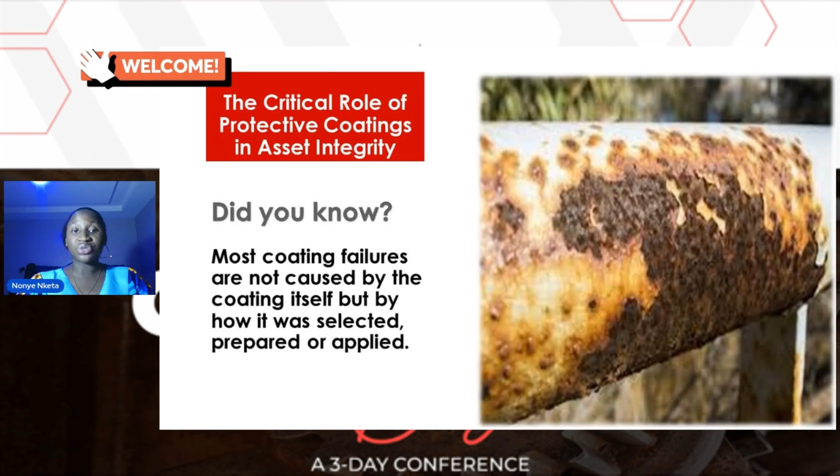Did you know that most coating failures are not caused by the coating itself, but by how it was selected, prepared, or applied? That is one fact I want to establish: a coating failure does not necessarily mean the coating is bad or improperly manufactured, but it is a decision from what we do—how we select the product, how we prepare the substrate, and how the product is applied. Protective coatings are engineered systems, not just paints.

I've had a lot of arguments about what is paint, what is coating, and the differences between them. Paint is paint. In fact, even professionals in the industry still hear a lot of people talk this way when it comes to asset integrity.

You know very well that it is not just paint, it is protective coatings, because we are trying to mitigate corrosion. We're trying to protect our substrates from corroding and deterioration that can come from the corrosive environment. Protective coatings are an engineered system, not just surface finishes, meaning there are a lot of intentional efforts put into formulations to ensure the product meets requirements of the substrate and the environment it performs in. They act as the primary barrier between assets and the corrosive environment.

When we talk about protecting our systems and assets in different facilities, what we are trying to do is prevent or protect that substrate, that asset, from reacting with the environment that will cause it to degrade. One of the common ways to actually protect this substrate is by the use of protective coatings. They act as this primary barrier between the assets and the environment they are placed in, and the condition at which they are working.

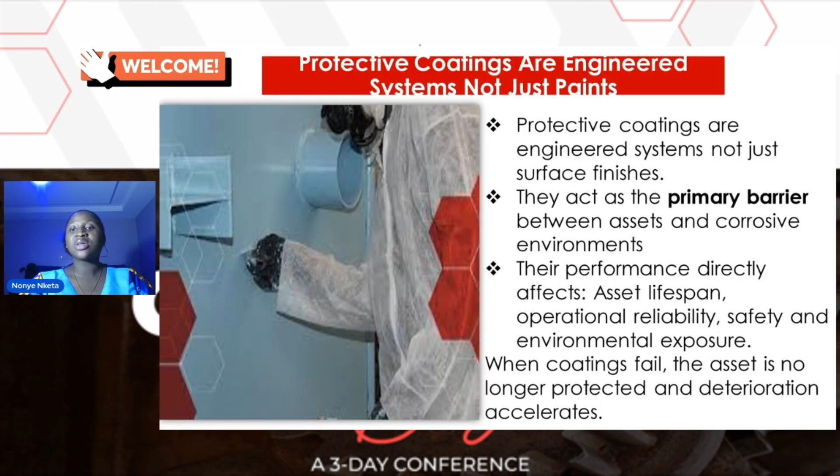Their performance directly affects asset lifespan, operational reliability, safety, and environmental exposure. So when coatings fail, the asset is no longer protected and deterioration accelerates. This is one of the reasons why we really want to protect what we value, where our money is coming from. Always keep in mind that the moment you compromise on the coatings protecting an asset, you're already trading with destruction—trading with loss, safety issues, and all the problems that come with degrading assets.

So coating selection—this is where it starts going wrong. I've heard a lot of people say, please just give me... In fact, I've noticed that in this part of the world, we are very careful with costs. We try to manage when it comes to design and material selection, but when it comes to protecting that system, that is when we know we are going above budget. So coating selection is often where most people still get it wrong today, and these are some of the ways.

Coating selected based on cost and not on the conditions of the substrate—this is very common. A lot of people can do everything right, but when it gets to the time for coating the system, that is when they start asking, are there no alternatives? Some will even tell you, let's just coat it so it looks neat for the GM or the asset owner to know that we are working. Some will even tell you intentionally, if we coat it in a way that it will last or stand the test of time, we won't get jobs.

So the cheaper the product, the more the opportunity for us to repeat this job. But if we look at it closely, is this really economical? Is it really safe? We do a lot of compromise because we're trying to cut costs. As far as I'm concerned, if we do that we're just being foolish in the real sense, because at the end of the day you spend more than you think you're actually spending.

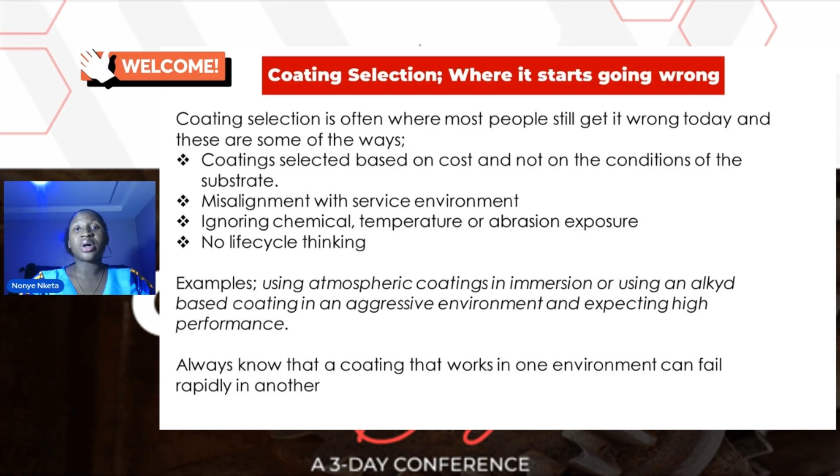So always know that a coating that works in one environment can fail rapidly in another. So it is not just about the coatings, it's not just about what you buy, it is about the decision you have made while trying to coat that system. So let's be more intentional.

Then matching coating resin systems to service conditions. The basis of every coating today is the resin, and the resin actually is the binder. It's what tells us how that coating will perform. That is the major chemistry behind every coating product. For any coating at all, you may want to ask what resin system it is, so that it helps you know how the coating will behave in certain environments.

Like for atmospheric exposure, you want to use an epoxy base, probably as a primer or intermediate coat, and a PU. And why are we using a PU? That's because epoxies are mostly susceptible to chalking. They are not friendly with sun, with UV rays. So if you want your epoxy to perform well in an open space or atmospheric exposure, you need to top coat with a polyurethane-based product. And why does it work? Because it gives corrosion protection plus UV resistance.

Then immersion, like you have a system that is submerged in water. What kind of coating would you use? An epoxy and a glass flake epoxy. The reason is because they have very low permeability and good barrier protection. Then chemical exposure, you want to use Novolac epoxy because of its high chemical resistance.

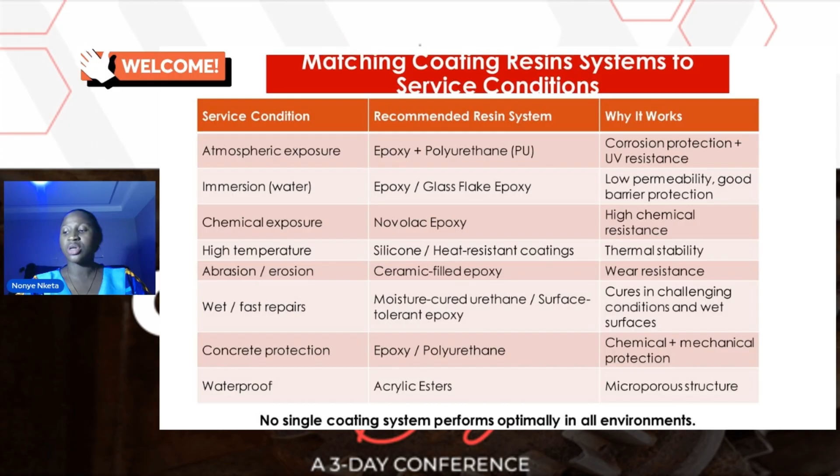So moving on to the next slide, we have surface preparation. This one cannot be overemphasized, and I think that is where the largest failure rates are attributed. Some of the common mistakes here are inadequate blasting. As coating inspectors, if you're on the field, you see a lot of this happening, and sometimes you see contractors giving you one reason or the other why the system cannot be blasted further. Some will even tell you, we did this. In fact, this time around, you see a lot of terms.

You hear a lot of terms, and you'll be wondering, where did this one come from? Like, is this an SSPC standard, or where? What did you develop this standard from? That makes you feel that with this current level of cleanliness that you have on that substrate, it can actually hold the incoming coating and it will stand the test of time. So we need to be very, very careful and be able to stand our ground in certain situations.

Okay, so residual contaminants. This is very common too, part of the cleanliness problem we normally have on substrates. Then incorrect surface profile. Yes, you see a lot of blasting going on. You see a lot of surface preparation. Know that when you don't have the correct surface profile for the system, for the coating that is about to go on top of the system, you're likely not to get the adhesion that is needed for that coating.

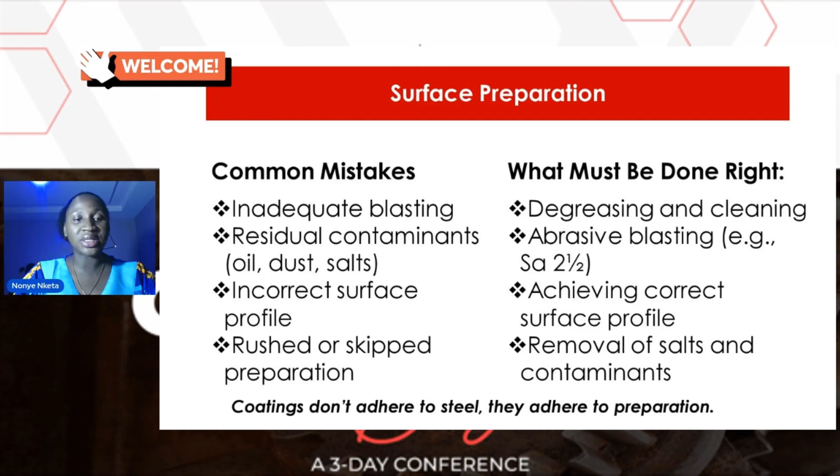But when we want to compromise at the preparation stage, just know that you're also compromising the result of that coating. And like I said in the earlier slides, when your coating fails, you just increase the rate of deterioration of that system. So coatings are there to protect the steel, and they depend on preparation.

Moving next to application. So we've talked about selection, we've talked about surface preparation. Now let's talk about application. The same coating that has gone through proper selection has also gone through good preparation before it is applied on that surface. The next thing is application. Now, I know there are lots of techniques that should be put in place when applying products, and it requires people that are skilled, people that know what is required. So application techniques, setting your spray gun, the pressure and all of that.

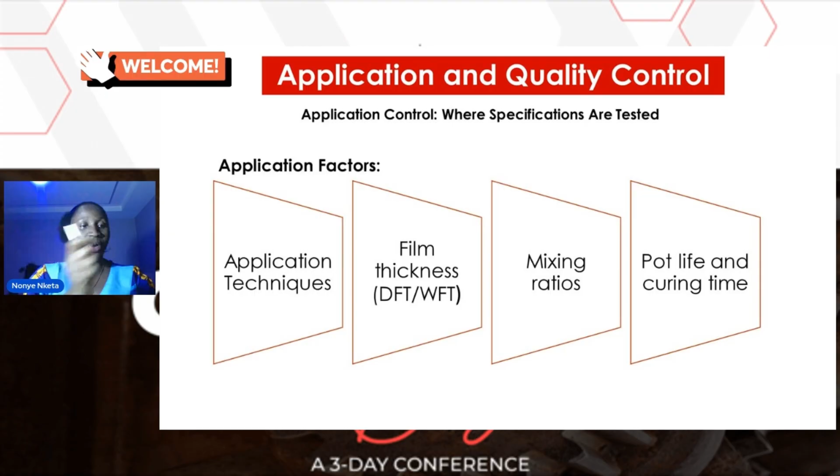Then film thickness, a lot of people don't even care. What they know is do one pass, do two passes. So you need to be sure that you're getting the required wet film thickness that will give you the specified DFT at the end of the day. Then mixing ratio, very, very important. Then pot life and curing time. All of this information is usually given on the specification data sheets or product data sheets or technical data sheets, as the case may be, depending on what the company calls it.

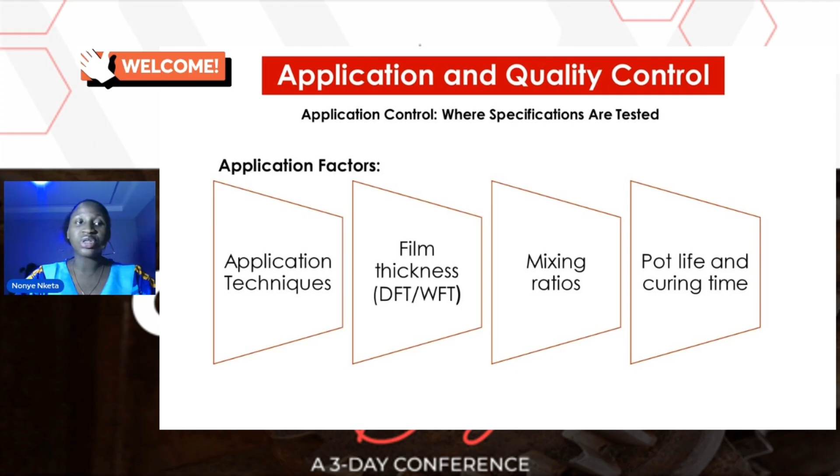So all of these are very important while you're preparing your coatings to actually do well on your substrate, to actually protect your substrate. And as you're doing this, you also need to check for quality and be sure that you are conforming to what is expected.

Then the next slide is environmental conditions. This is the part that most people often overlook. You're just ready to coat, not even wondering if the environmental condition is suitable for the product you want to apply. The temperature: as a rule of thumb, we know that surface temperature must be at least 3 degrees above dew point. 3 degrees above dew point. Do we really check? Sometimes you see some people, they will tell you, okay, we can do this job at midnight before the asset owner comes.

So as much as you want to see your job done fast, as much as you want to meet up to deadlines, please, you have to be very, very careful, because these assets are very critical and important, especially in the oil and gas environment. In fact, every environment actually, because we have steels performing different functions in different industries.

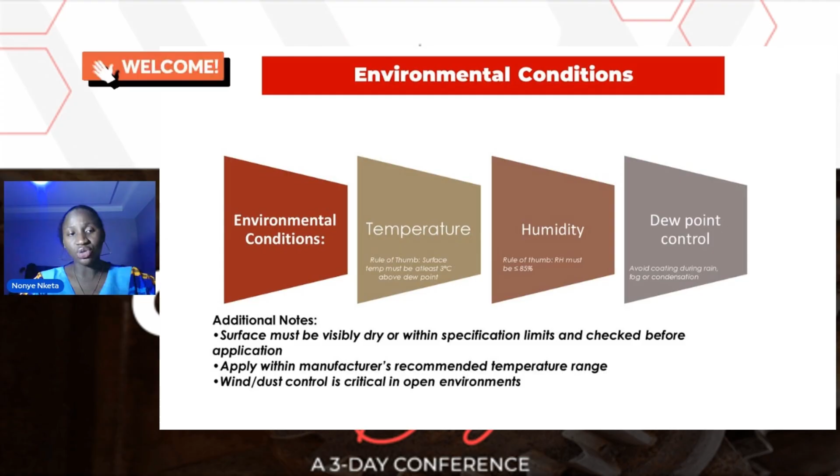Then the humidity: as a rule of thumb, relative humidity must be less than or equal to 85%. Then dew point control too. Avoid coating during rain. So you also have to ensure that you are conversant with your technical data sheet. You need that document. I've seen a lot of people who buy products, and even when you give them the technical data sheet, they don't know what to do with it. And I want to believe that as professionals, that should not be seen within us.

You have to ensure that your technical data sheet is as important as your notepad, as important as your logbook. You understand? So you have to be sure that you're working within specification limits and what the technical data sheet is saying to guide you on how to go about application of this product. Virtually every technical data sheet I've seen gives information about the level of surface cleanliness required. It tells you even the settings of your spray gun. It tells you the kind of environmental condition or temperature at which the coating should be applied.

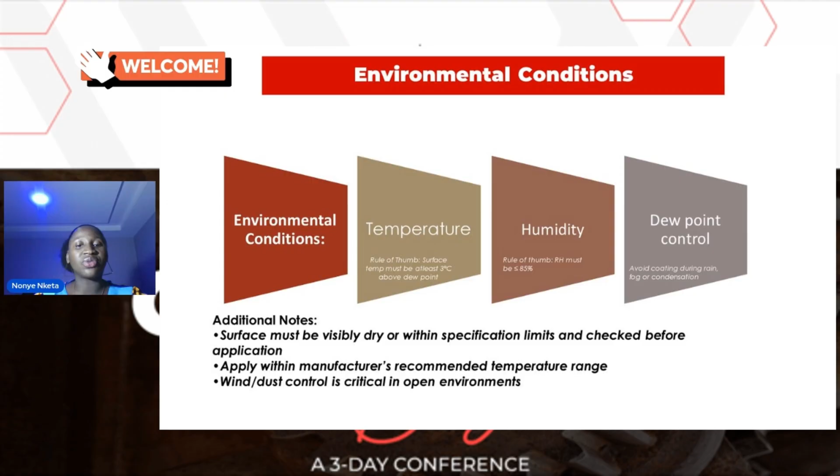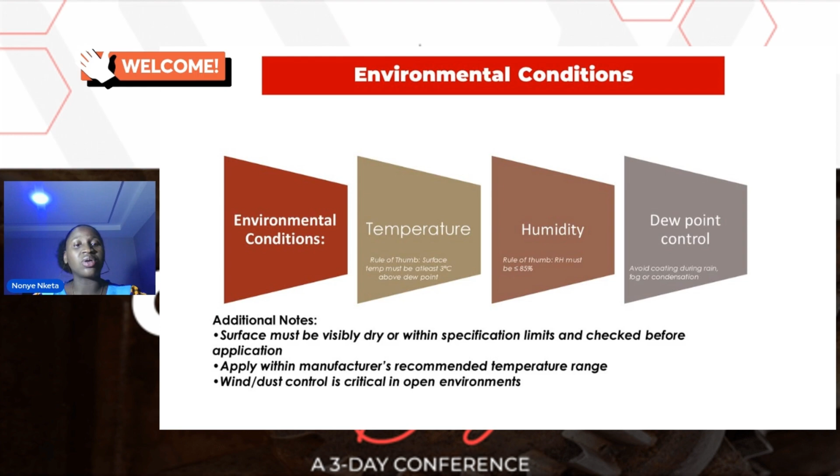So let's always do it. That is one area a lot of us actually miss. If you're not sure how to go about it, consult the manufacturer's data sheet. Apply within the manufacturer's recommended temperature. I already said that. Then wind or dust control is critical in an open environment. I notice a lot of us also ignore this part. So if you are coating in an open space with high wind speed or the likes, you may need to control the environment in such a way that it doesn't give you a bad spray result, or even bring the dirt that you've wiped off back to the surface.

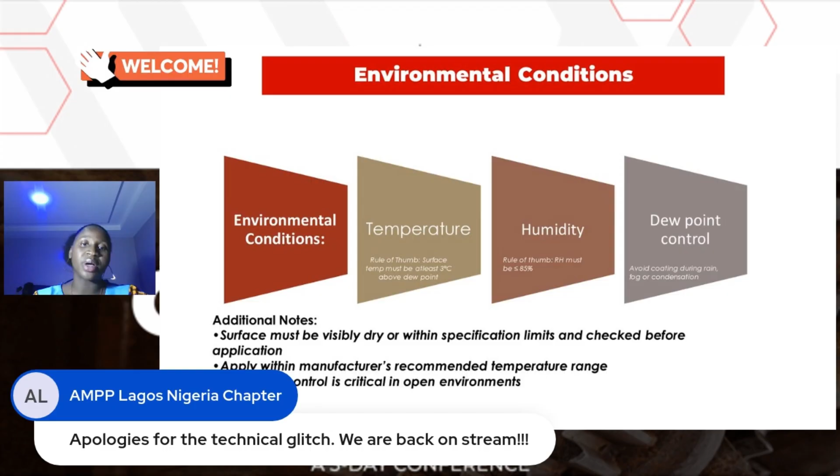So this now takes us to quality checks. These steps are important to confirm all parameters are within specs, align with the coating manufacturer's data sheet, and conform to standards and best practices. It is important to check the following after application. So we've talked about what protective coating is. We talked about selection and how we should be intentional about it. We've talked about surface preparation and the quality checks that should go into our surface preparation, quality assurance. You check anywhere that corrosion could start from. You need to do all of that.

Then adhesion test too. We all know that the adhesion test is actually destructive, and I normally advise you should always have a sample panel to do all of this off field before getting to the field, or before carrying out that same test on the system you have coated, except the asset owners authorize you to do so. You understand? You don't want to destroy a 3,000 cubic meter tank because you want to prove that what you have inspected or coated is right, except the asset owner tells you, okay, go ahead, I want you to carry out the adhesion test on the substrate and let me know. I'll bear the cost of whatever it will take to repair it.

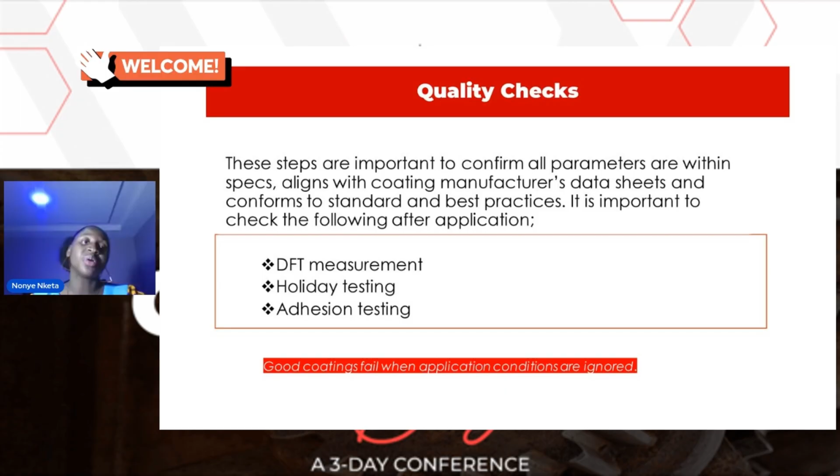So once you've done that, you document rightly, and you're sure that you can report the exact condition of the substrate that has received coating. And apart from documentation, when there's a failure, you know what to reference, and you are able to trace where these failures come from. Good coatings fail when application conditions are ignored. That is just the truth. If you don't do all of these things, no matter how good the coating is, it's likely to perform below expectation. Then failure mechanisms and root cause.

So we see a lot. These are a few of what we see almost every time on the field. So you may have blistering. This is actually very, very common. And what are the causes? Moisture ingress, salt contamination from the system. Then peeling. That one is quite obvious: poor adhesion. And sometimes when you apply a coat without a primer for a product that requires you to prime before you apply it. If you don't prime, you're likely to get peeling.

You're likely to get the paint to peel if you don't get the right surface profile, because surface profile gives you the anchor for this product to adhere upon. So if there is no proper surface preparation, and you don't have the right primer beneath the top coat, it is likely not to stay. It is actually very common.

Then cracking, which comes from excessive thickness. Then rust bleed. In fact, that's actually the result - you see a very beautiful coating that you think is very nice, very clean, smooth and shiny, and you start seeing dots here and there with rust from those portions. That is a result of an area that's been skipped while coating is ongoing. That's a result of all the pinholes.

Then blushing. Amine blush, for epoxy based coatings, comes up mostly when you're coating under moisture or a high humidity environment during drying. So you want to cure a product that is not supposed to cure under moisture, while the relative humidity is high. You definitely get that skin blushing. Those blushing are all those things you see - you start seeing a lot of shades on a surface that has been coated.

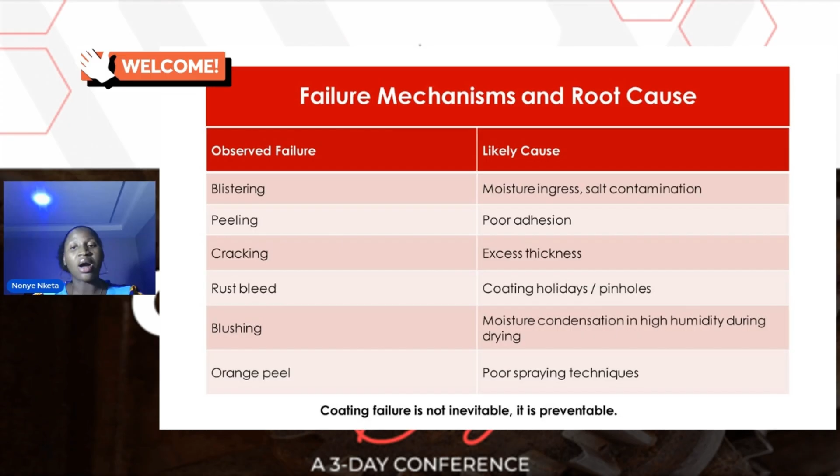So some coating failure examples, these are quite common. I want to believe at least 90% of us on this call would have seen some of these failures or coating defects on the field. So I just picked a few common ones.

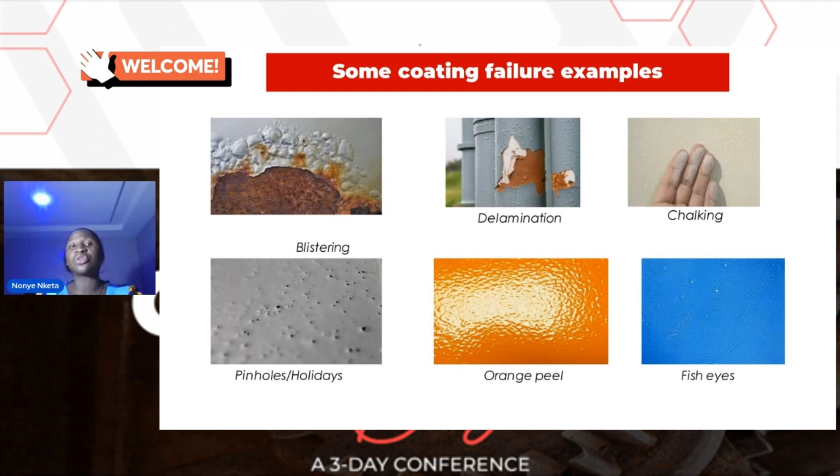These are quite common. It's just for me to let you know that yes, they are common, but that does not mean they should actually be happening. On this kind of day, World Corrosion Awareness Day, it's just for us to reinforce our knowledge and remind ourselves that just because they happen always does not mean it is impossible for them not to happen. It's a conscious effort we all have to put together as professionals in the industry to reduce the rate at which our coatings fail.

Then going to the next slide, breaking the cycle of coating failure. I've talked a lot about why coating fails. Now, how do we actually stop this from happening? Like I said, even though it's not on this slide, it starts from our own individual decision. It starts from our attitude, from how do we really see these coatings. Is this supposed to be just for the sake of working and getting paid, or do we really have to make this protective coating protect what it is supposed to protect?

So it all starts from our decision, from coating selection. It all starts from the conscious effort we put in while trying to ensure that our surfaces are clean. So select based on service condition. Like I said, no two coatings perform the same way everywhere. That a coating works very well on this particular region or surface does not mean or guarantee that it will perform very well in another region. So select based on the service condition of that system.

Use correct resin systems. Just like I mentioned earlier, every service condition, every operational condition, every factor that goes into a system determines what kind of coating best protects it. And those are the informations we need to get or be sure of before choosing what product works for different environments.

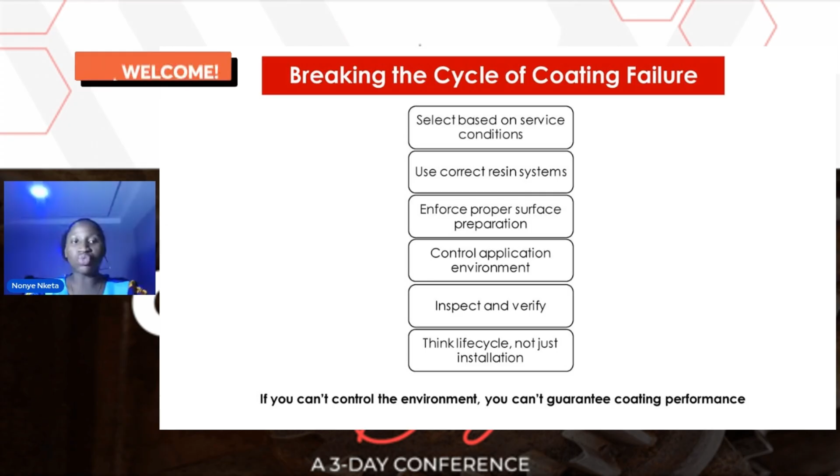Then, if you can't control the environment, you can't guarantee the coating performance. So it's still a human thing. The coating will not decide for itself how it's going to behave. You do the necessary things, and the coatings will behave accordingly.

Then the next one—this is just an addition to the slides—advanced composite repairs. Now, yes, we have coatings engineered to do certain things, different functions in different environments, but there's always room for improvement, new innovations here and there. And that's where we come in.

That's what brings us to advanced composite repair. In many real world applications, especially repairs, we rely on engineered composite systems like those from Belzona products that my company uses. It's not realistic for you to coat the face of those flanges. Are you supposed to uncouple the flange just because you want to coat it? That's where advanced composite repair material has come to actually supplement—yeah, that's the word—supplement areas that coatings cannot do, maybe due to limited access.

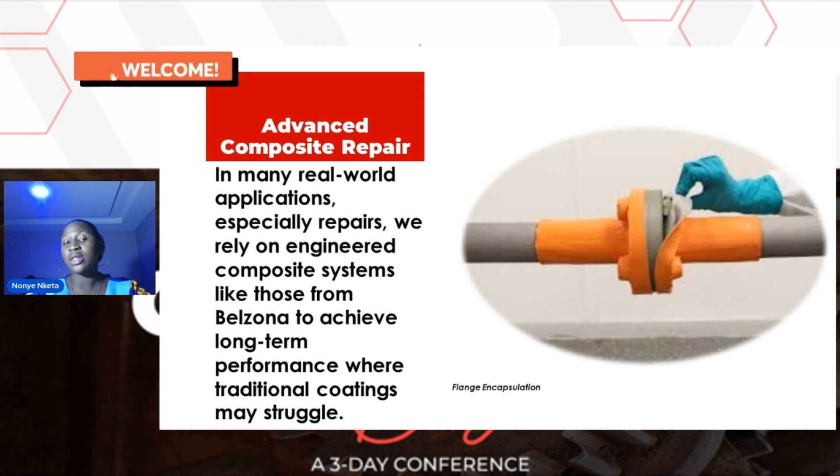And this is, for instance, flange encapsulation. Who would have thought I'm going to coat this flange and still be able to peel it and close it back from time to time? You understand? These are innovations that have come from the coating industry to make up for areas that ordinary coatings cannot do, and I want us to also look toward that direction from time to time.

Then, in conclusion, protective coatings do not fail by chance. No way—'oh, it happened by mistake, I don't even know how it happened.' It's not like you don't know how it happened. It's just that you didn't put concentration where you should have. You put your energy in the right places, and those places are the foundation, the fundamentals, starting from your decision to get a coating product. So protective coatings do not fail by chance, they fail by design or execution, whichever way.

When we get selection, preparation, and application right, always know that you're not just protecting the asset, but we are also preventing failure. We are keeping our integrity intact, and we are also growing our professional presence. And that brings me to the end of this session.

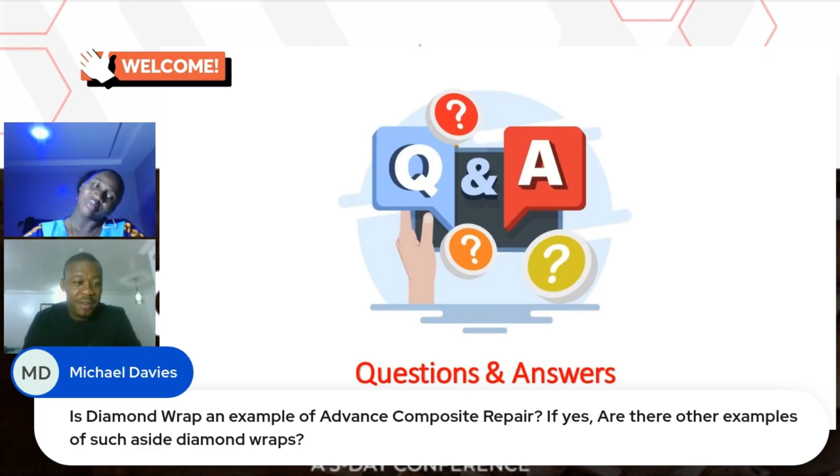So we have another one from Michael Davies, and his question is: is diamond wrap an example of advanced composite repair? If yes, are there other examples aside diamond wrap?

Okay, so this question looks like a brand question. Sincerely, I don't even know diamond wrap, but I'm aware of advanced composite repair.

So for the fact that I don't know diamond wrap and I know advanced composite repair, it just gives you the answer. Diamond wrap may be an example, maybe not.

I'm not sure, I don't know about that. But when it comes to advanced composite repair materials, there are so many, but like I said, I represent a brand here in Nigeria with the company I work, and that is Belzona.

Belzona is an advanced composite repair product that does all sorts of things, not just coatings now, but other polymeric products. These polymeric products are designed in such a way that they go beyond what coatings can do.

Actually, like you have products that can, just like I showed you in the flange encapsulation session, you have products that you can use to protect your flanges from moisture ingress.

It's designed in such a way that from time to time you can actually open this encapsulation to confirm that, or if you need to probably open these valves, you can confirm and close it back.